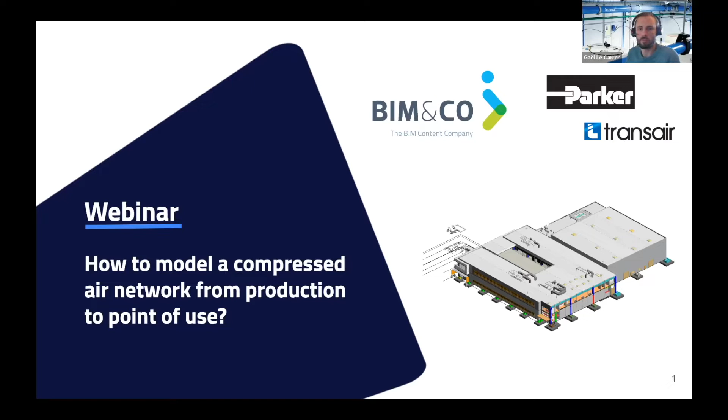Okay. So as for me, my name is Gael Le Carrer. I'm French and based in France, and I've been working for Parker Transair for 6 years now. And I'm part of a team called the Project Support Team, which is helping our customers with their industrial fluid project through design and sizing of installation, technical questions and other matters, drawings, quotation, bill of material, etc.

To start this webinar, first a presentation of who we are. So Transair, who we are. We are a manufacturer of modular aluminum pipe systems. What do we mean by that? Aluminum because our technology is using aluminum pipe, and modular because we have connectors with quick connections to do the connection in between the piping. Transair exists since 1996, so we've been on the market for more than 25 years now, and we are a made in France product.

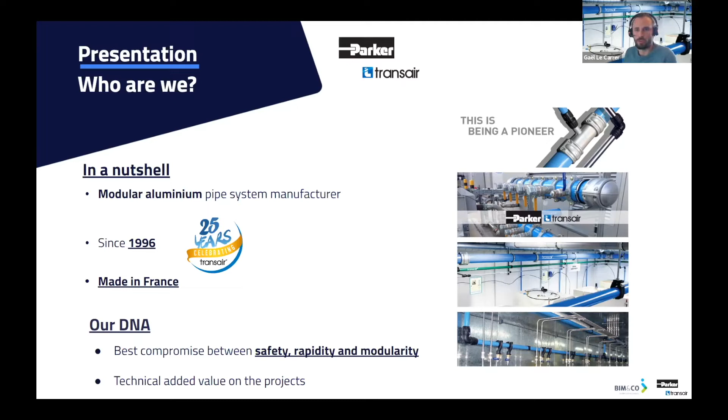When it comes to our DNA, I would say, Transair wants to offer the best compromise between first, safety. Safety is really what's most important for us. Safety of the persons who are going to install our system, but also the persons who are going to use it after. And second, rapidity and modularity with the use of our quick connection technology. Also, we want to have a technical added value on the project with the support of the team. I'm part of the project support team.

When it comes to our specification, Transair can be used to transport 3 types of fluid, I would say. First, we will have compressed air up to a maximum working pressure of 16 bar. Compressed air is used mainly for tooling, blow guns, but also all kinds of machines within the industry. And then we'll have vacuum up to 1 millibar in absolute pressure. This is what we call industrial vacuum. And there we will find, for example, vacuum packaging processes or heavy parts handling.

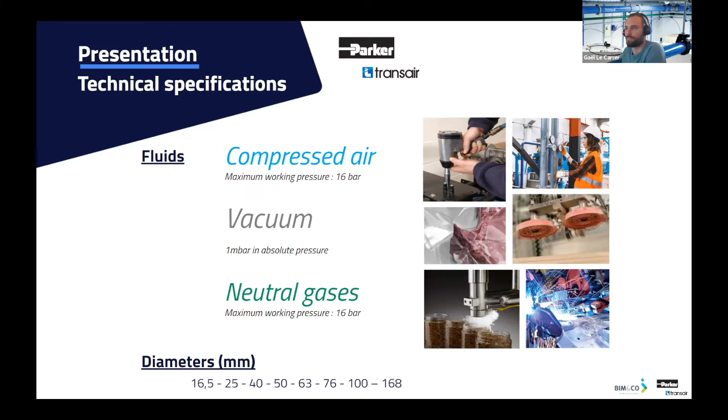Last, we will have neutral gases up to 16 bar, once again. And there, as neutral gases, we will mainly have first argon and its mixes with welding processes, for example, and then nitrogen with inerting processes through the food and bev industry. When it comes to our diameters, Transair offers a large range of products and diameters from 16.5 millimeters up to 168 millimeters, which allows us to make a project from the technical room with our biggest diameters up to the point of use with our smallest one. Now we'll leave it to you, Vincent.

Thank you, Gael. So same for us. Who is BIM&CO? First of all, we are part of a group called Trace Group, a software editor created more than 30 years ago. We are now more than 250 people, generating more than 20 million of revenue in Europe. We are doing many things from electrical calculation, PV calculation, energy management, or LCA analysis. And BIM&CO was created more than 6 years ago now with the mission of delivering technical content from manufacturers into digital processes, so basically into BIM models now.

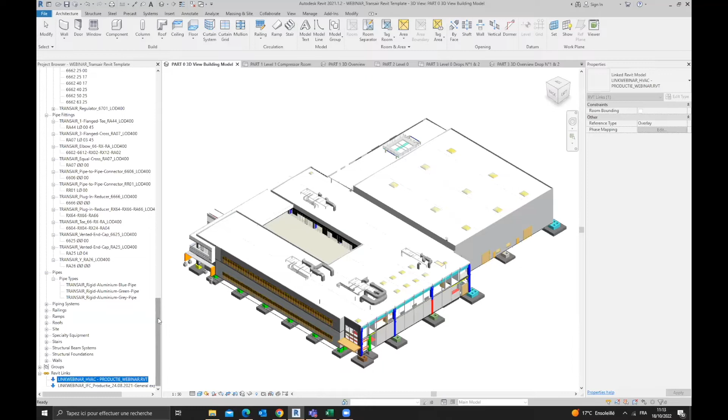To speak more about the work we're going to do today, I will switch to a floor view. So this is a floor view of the building. The part of the building which is going to interest us most today is the top part. You can see already other networks that have been designed in the HVAC model. And today we're going to be designing the compressed air network in a space in between those pipes. The network is going to run here on this top part.

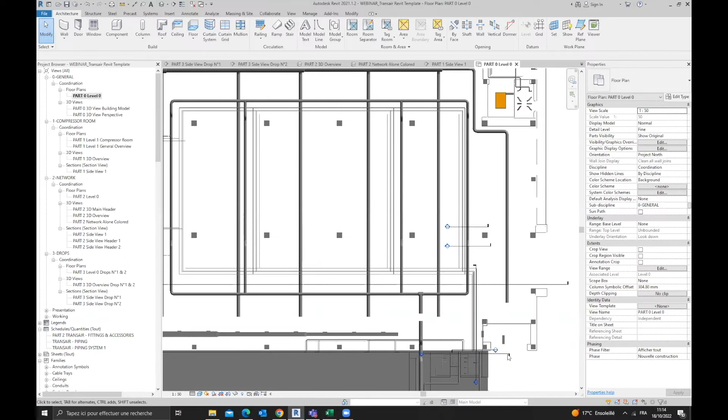And the compressor room, the technical room, will be coming from here, from that corner here, and is located at level 1. So this building has 2 levels, level 0 and level 1. The network will be at level 0 here on the top part, and the compressor room will be here on level 1.

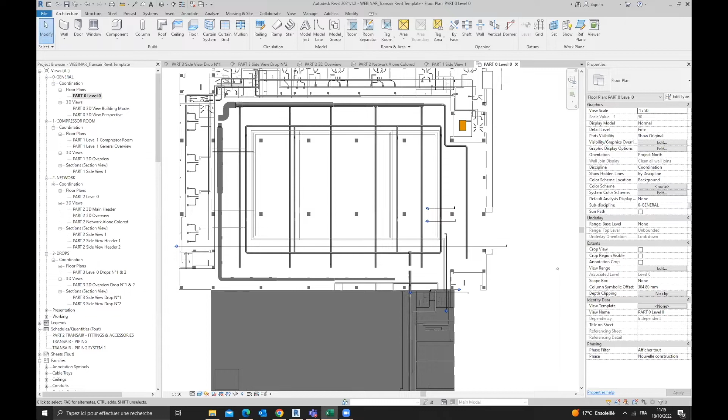So first we'll be designing the technical room, then we'll switch to the network, and we'll finish with a couple of drops, just for you to have a good idea of how we model the complete compressed air network. To speak about the compressor room, let's have a 3D view of it. So here I am at level 1, as I was saying.

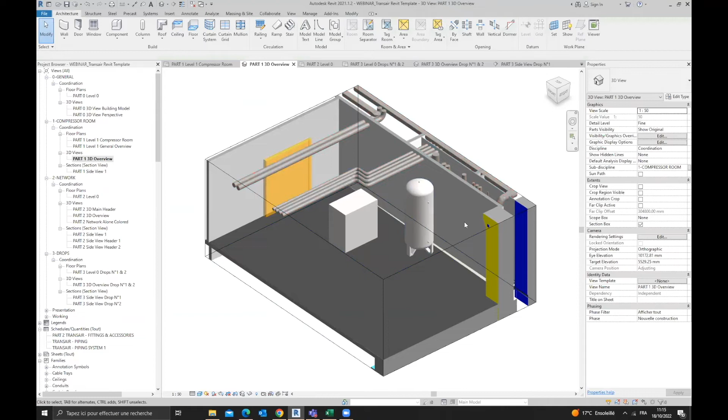I already have my compressors and receivers. So today we will be connecting the compressor and the receiver together, and we will also be creating a bypass on the receiver. As you can see, my compressor and the receiver already have the connectors, diameter 50 millimeter.

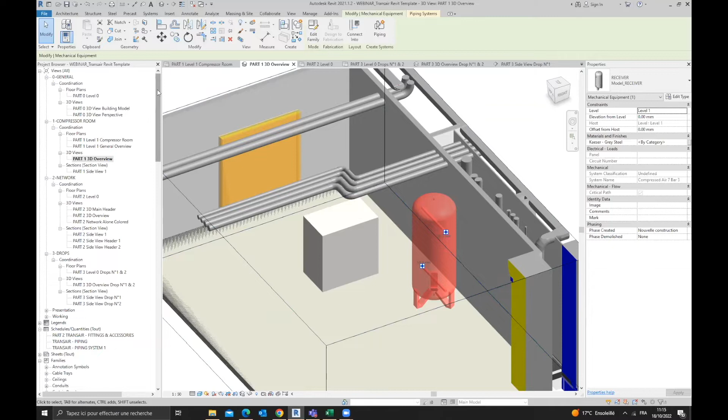When it comes to designing a compressor room, the most important thing to know is that you can't plug our pipes directly inside the machine. As I was saying, Transair is a quick connection technology. So you need a part that is going to be the link between our piping and the standard thread. That part, that family, is what we call a male stud, and it's going to be found within the project browser in the pipe accessories category. Part number 6605, so here, male stud fitting.

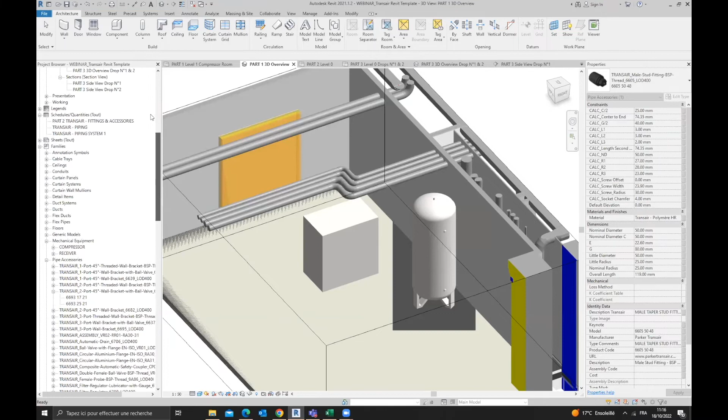What I recommend you do when designing your compressor room is to first connect those male studs on your machines. And once this is done, you can connect your machines in between them. To connect this male stud fitting, there are 2 main methods. I will switch to a floor view of the compressor room. The first method is what I would call a quick grip method. I'm not sure how to say it in English.

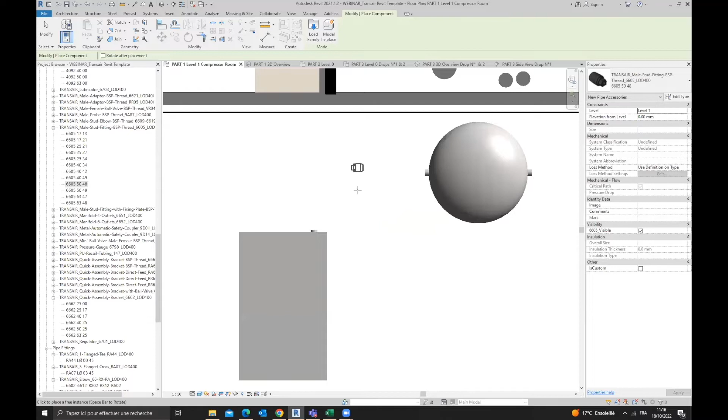I'm taking my object here, my family, and as you can see, my male stud is linked to my mouse. And if I approach my male stud fitting to the connectors of the compressor, we can see it switching side, going from horizontal to vertical. This is because if I put my male stud inside my model right now, Revit will automatically connect it to the connector of the compressor.

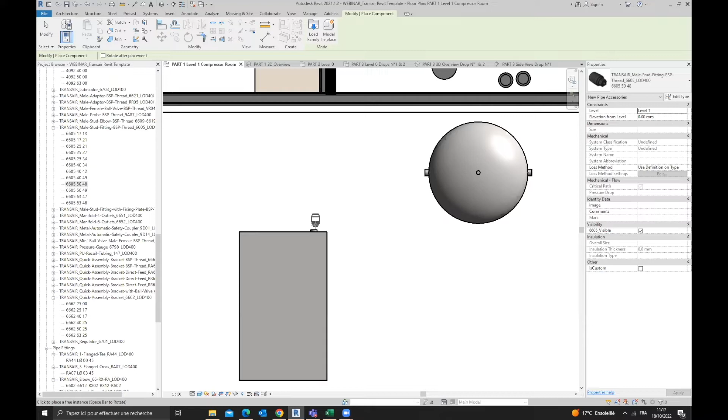So how is this possible? This is because the compressor is set as a mechanical equipment. So not special equipment or generic model, but if you set your equipment inside the category mechanical equipment, you will have that quick grip allowed. So if I bring my male stud next to the connector of the compressor, I'm placing my male stud, and you can see the male stud appearing and being directly connected on the compressor. So it really saves time and makes things a lot easier.

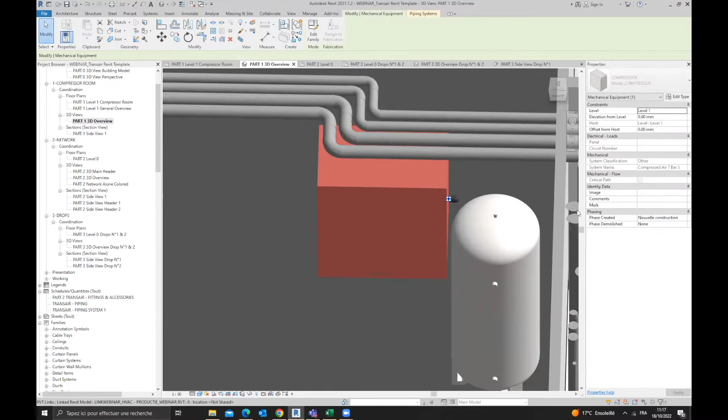If I switch back to my 3D view, let's change side a little bit. We can see that if I move my compressor, the male stud is also moving with it. Now let's switch back to our floor view.

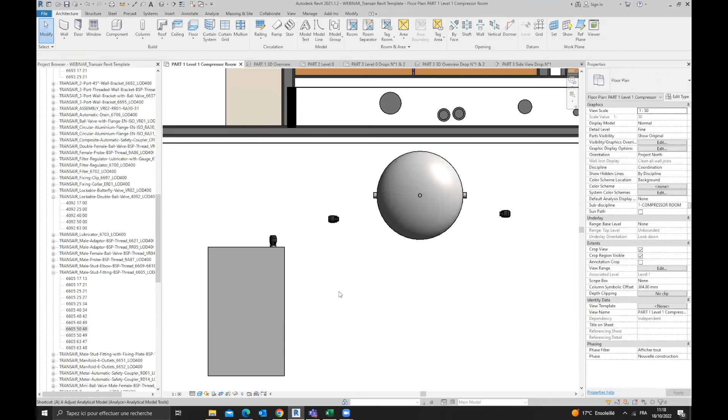Second method, a more classical one. So we're going to first place our male stud within our view, placing them manually from the project browser. I'm going to turn this one 180 degrees so it's facing the right side. Then I will align my male stud on the connectors of my receiver. So I'm aligning both of them.

And now I will be switching to the side view you can see here, which is going to give me a nice look of what's going on.

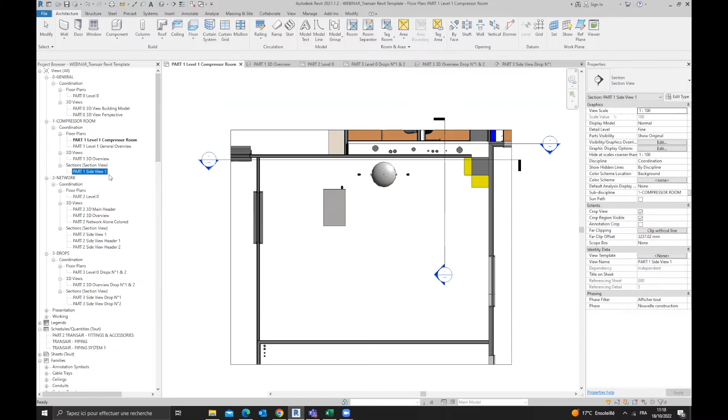Switching to the side view, we can see the male stud here at level 1, on the level 1, but elevation 0. I can take my male stud on the connector of the threaded part and bring it to the connector of my receiver. As you can see, when they are both at the same location in the model, you have that pink circle and pink cross in each other.

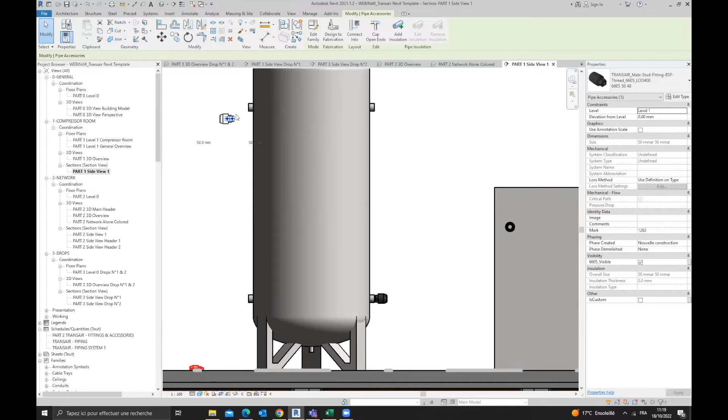If I place the male stud right now, the connection will be made between the male stud, so my accessory, and the receiver. I can do the same for the outlet, placing it, and you can see that in a matter of seconds, I've got both my mail studs connected to my receiver.

Something for you to know as well when it comes to compressor rooms: receivers located right after compressors always have the inlet at the bottom and the outlet at the top, for you to know.

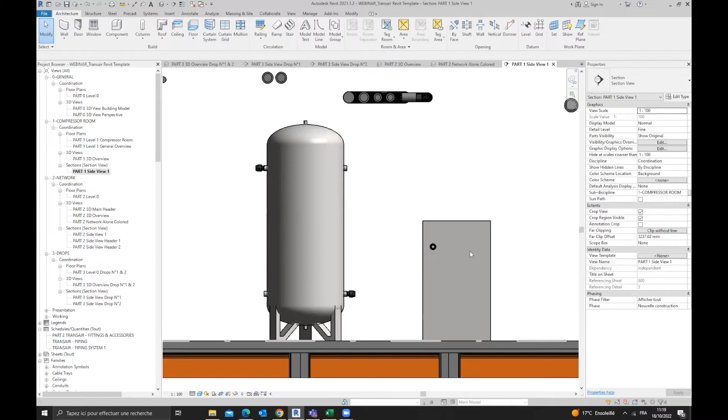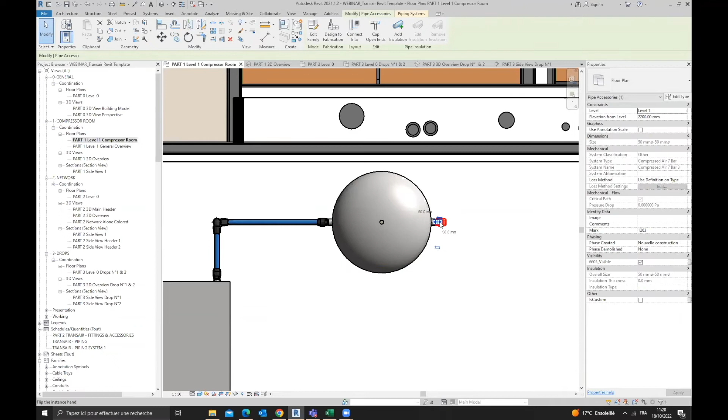Once we've connected our mail studs, our accessories on our equipment, I'd say the hardest part is done. Now we only need to connect them to each other. So I can go on my male stud, right click, draw pipe, and do the connection in between. I will need to change elevation and go to 600. I go inside my male stud, and I can do the same for the outlet of the receiver. Right click, draw pipe, and I will start my main header that will go to the main network, with elevation minus 1700.

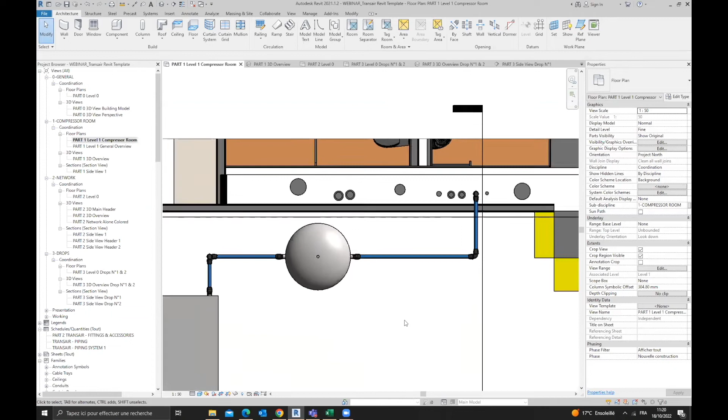As I was saying, the network is going to be located at level 0, and right now we are at level 1. So for now, we've done the connection of both the compressor and the receiver, as you can see. Now we are only missing the bypass.

So I will switch once again to my side view, and now I will convert this elbow into a T. When you click on Ts, elbows, or crosses, you will have little plus or minus signs appearing, and by clicking them you can convert elbows into Ts, Ts into elbows, and so on. So I will be converting my elbow into a T.

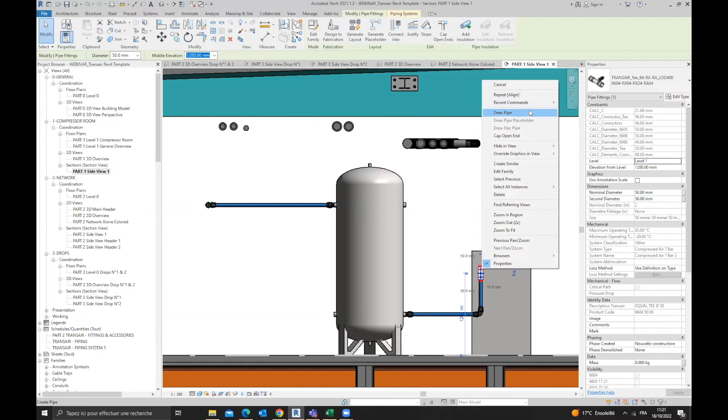Then once again, I can start drawing the network. The routing preferences within the template will do the job and provide me with elbows, automatic T creation, and so on, making things a lot easier to draw once everything is connected.

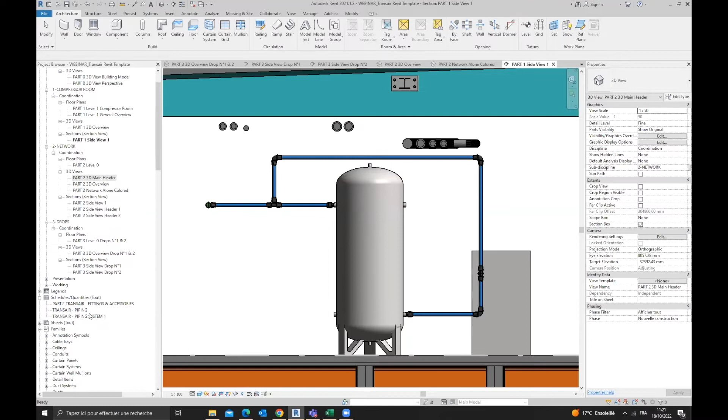Now we're only missing the valve. So, shutoff valve - we will find them once again under pipe accessories. Part number will be 4092, this one. I will choose diameter 50, and I will directly plug my valve onto my piping. Same as before, you've got automatic grip activated, so everything will stick to the piping in a nice manner.

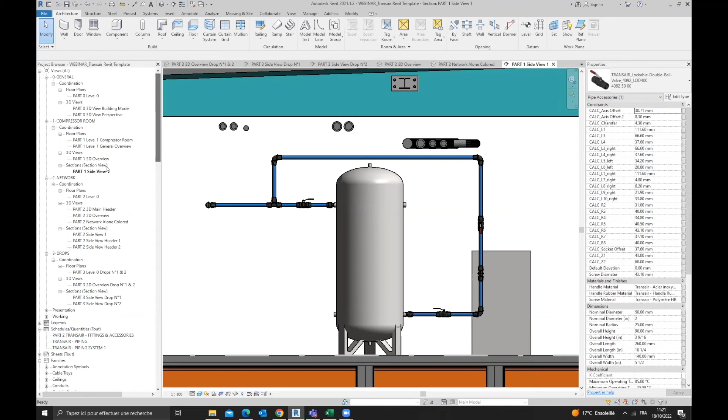If I switch back to the 3D overview, you can see the compressor room we just did: a compressor, a receiver, both connected, and a bypass on my receiver.

As well, for you to know, here we are with threaded equipment. If you have bigger equipment with flanges, they also have these parts - we have their flange fittings, which you can also find in pipe accessories, part numbers RA30 and 31.

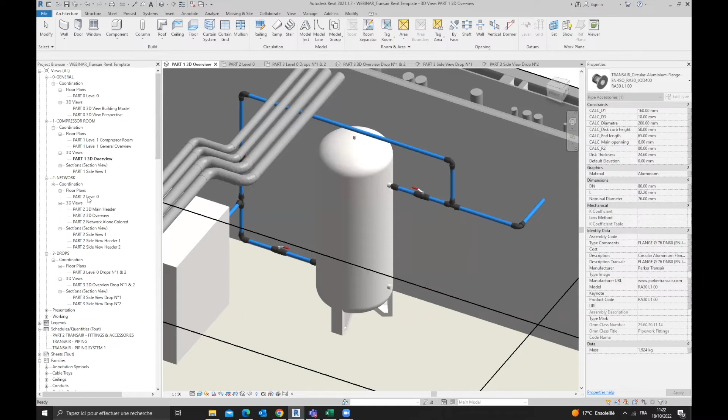Now let's continue to the main network. I will switch to my floor view of my main network. So the compressor room has been done here, just above, on level 1. We can see the beginning of our main header here, starting at diameter 50.

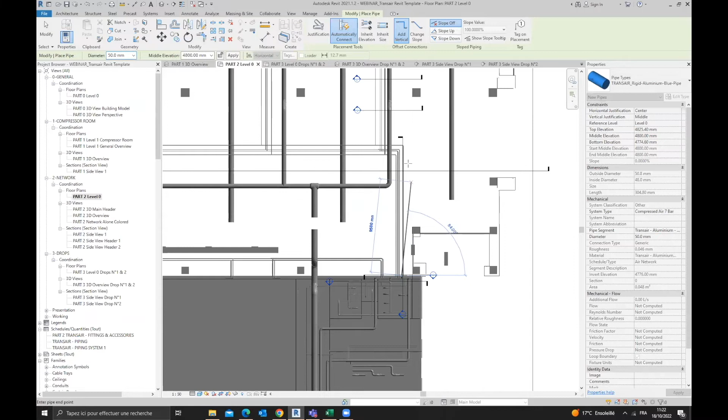To do the network, I will start where I finished with the compressor room, starting from the main header, and continue straight forward. When it comes to the main network, this isn't the hardest part in my opinion, because it's mostly length of piping to draw, and the routing preferences will set everything - elbows and tees. When it comes to networks, usually the loop is going to be one diameter under the main header.

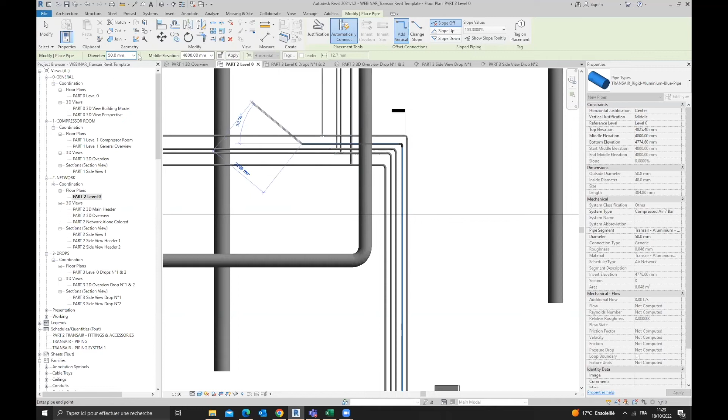So here we have a main header at diameter 50. We're going to switch our main loop to diameter 40. I change my diameter and continue to draw my loop. We can see the reducer automatically added by the routing preferences, by the template, and I just continue to carry on and create the loop in between the pipes.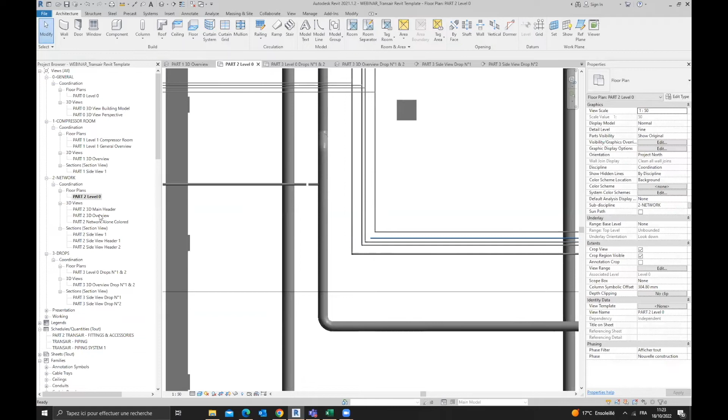If I switch to a 3D view of the area I'm working in right now, you can see the area where we are right now, with the piping already drawn within the HVAC model.

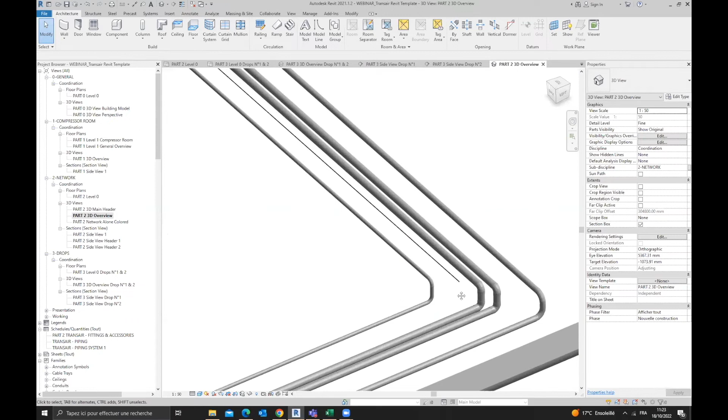If we go here on the side, there is a little particularity with that network: the sides are at a lower elevation than the main line. So here I am at 4,800 millimeters above level 1, above level 0, and here on the side I will be at 4,500. So I will take that into account to draw my loop.

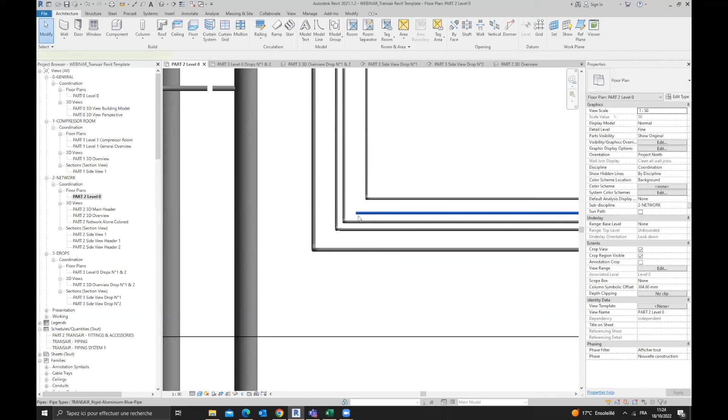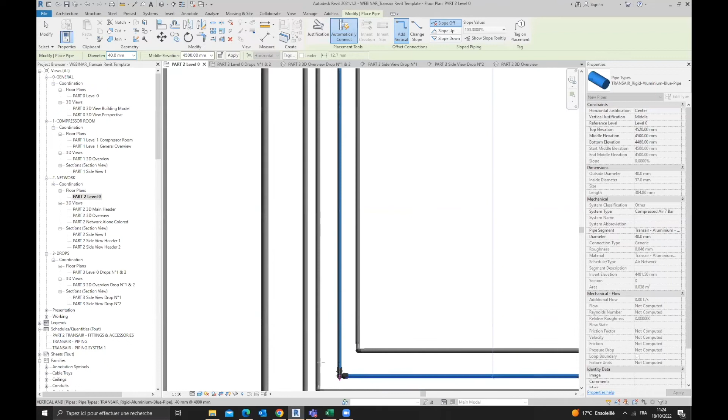Switch back to my ground view, continue from where I stopped, draw pipe. I will change the elevation here within that green panel to 4,500, and then I'm continuing my network. The routing preferences, as you see, will create everything automatically - elbows, tees.

I'm continuing to do my network. So here, on that side, I'm getting back to 4,800. Coming here at the end, 4,500 once again, and then connecting here on the main header.

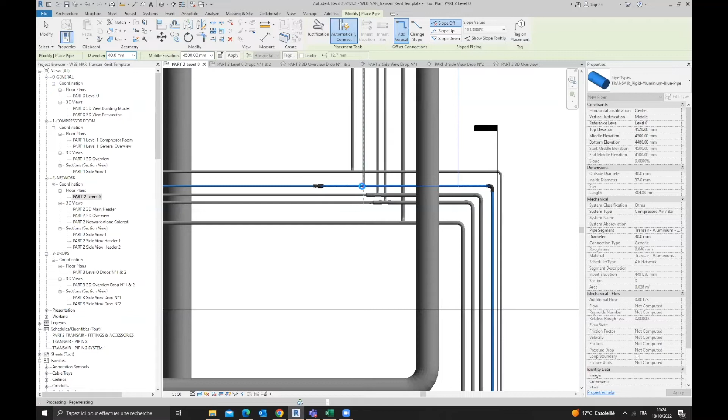Revit is calculating, and you can see the T automatically created. If I switch to the 3D overview, you can have a bit of appreciation of what we did. So the main header coming from the compressor room, my reducing T, diameter 40, which goes to one side of the loop, and my plug-in reducer, diameter 40 as well, which goes on the other side.

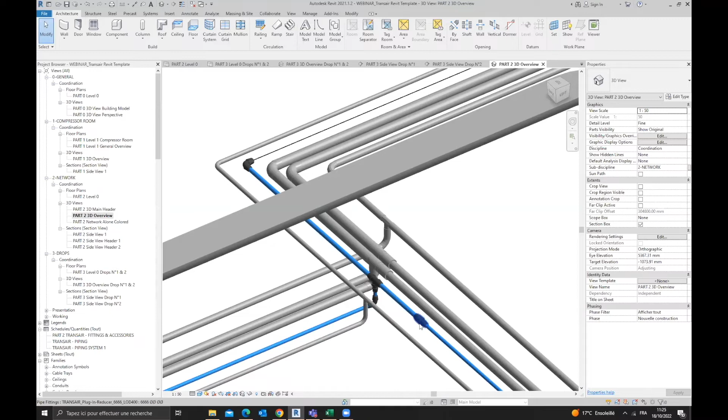Now a little side talk I would like to speak about before we head to the drops. It will concern error and mistake detection within the template.

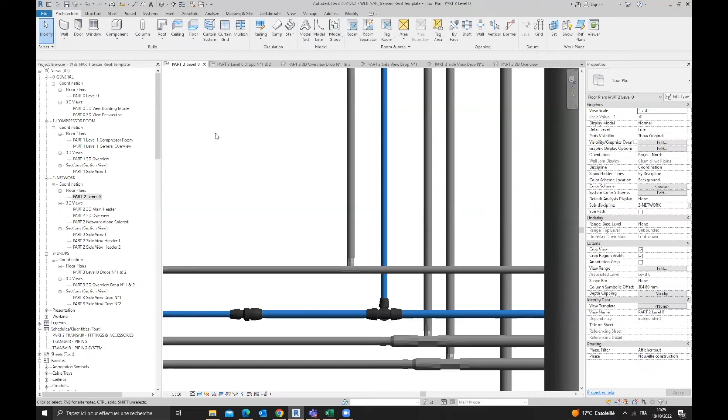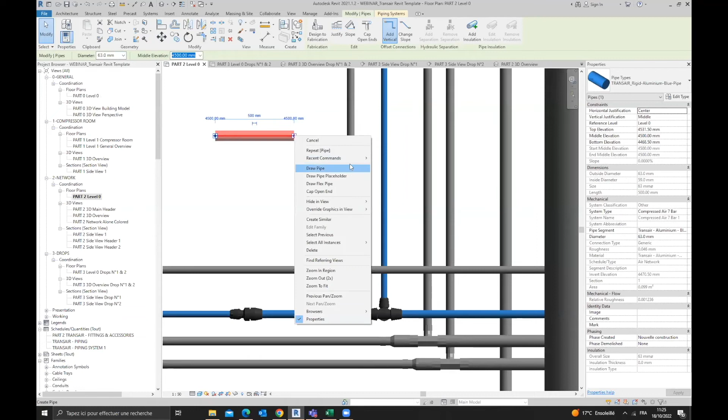I go on my loop. Revit is calculating, and it's going to provide us with a T, as it did before within the compressor room and the network. But when we have a closer look at that T, we can see something is kind of strange. There is some gap between the T and the piping. The piping is literally going inside the T on that side. So there is something wrong going with it.

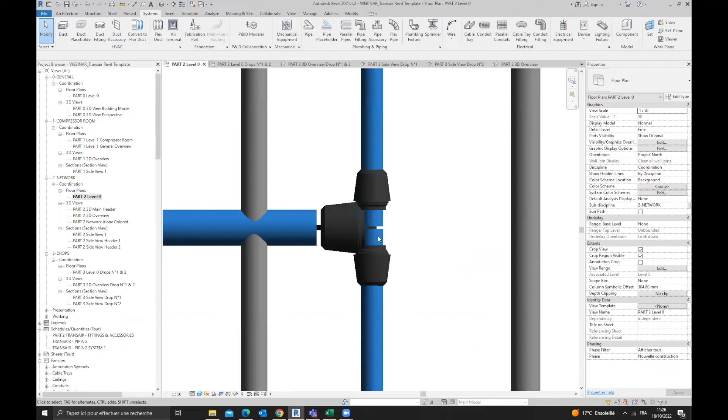Why? Because that T does not exist within our range. This is a mistake that Revit made using the tables. So how do you detect this mistake that can happen on the T on a rare occasion, because the T is the most complicated part? Well, there are two main methods.

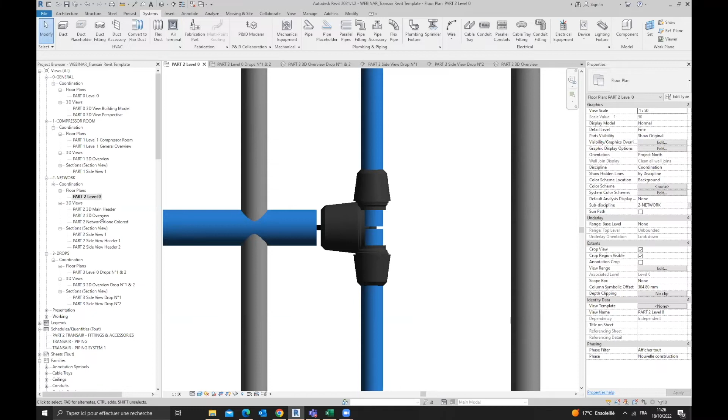First method, if you switch to a 3D view, you can see red circles appearing, red warning signs. When you see them on your 3D view on some parts, it means there is something wrong with that part, and you need to manually apply a correction to restore the proper part. So this is the first method, red warning signs.

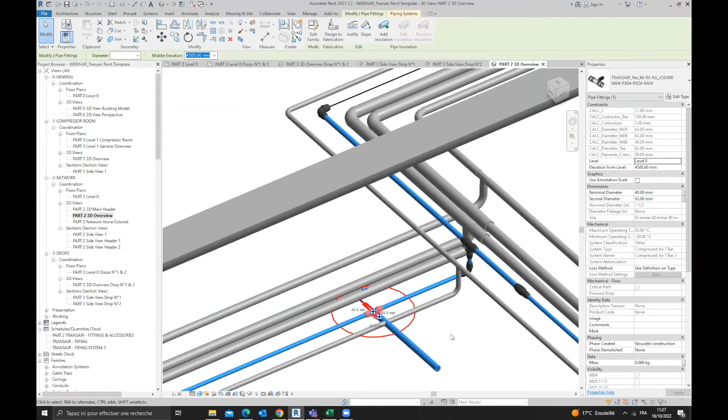Second method will be to use a shared parameter. So for you to know, each and every one of our families has a common shared parameter called a product code, which you will find within the identity data of each family. That product code, when it's right, will give you the part number of the family. So if I switch to the elbow here, you can see product code 6602 4000. So this is good, and the description going with it as well.

When the fitting is wrong, there is something not right going with it. Both of these will give you a non-display, meaning there is something wrong going on. Knowing that, you can easily create a schedule, a bill of quantities.

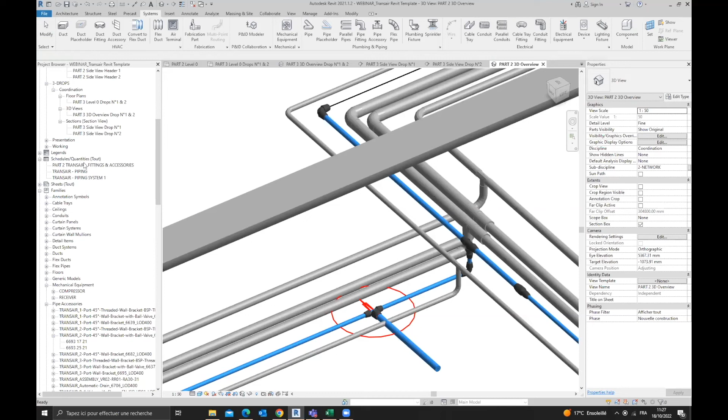I did set one already, and if you go to that list of quantities, you can see all the different parts we designed at the beginning. So diameter 50, valve, elbows, and so on. And you can see here at the last line, product code unknown, description unknown. You can see it's one quantity, diameter 40, family and type a T. This is the T that Revit messed up creating. So this is a nice way, when you are drawing a network, to have a schedule set and check on a regular basis if you have those non-products appearing, and correct the mistakes right away.

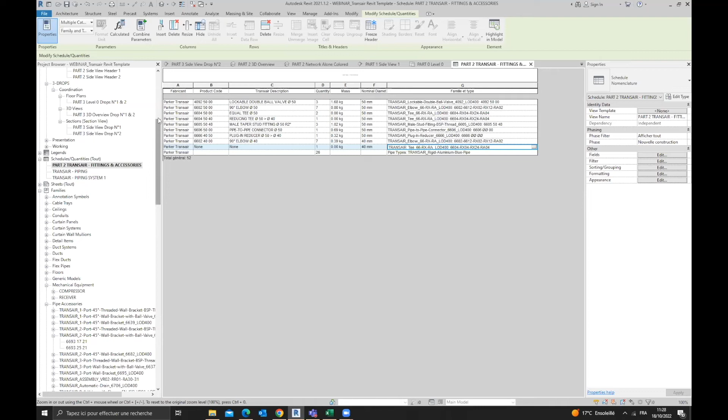If I switch back to my main network, here's a problem. It's because the reducing T wants to do something too complicated. It needs to put several families on top of each other. It's too complicated for Revit to do.

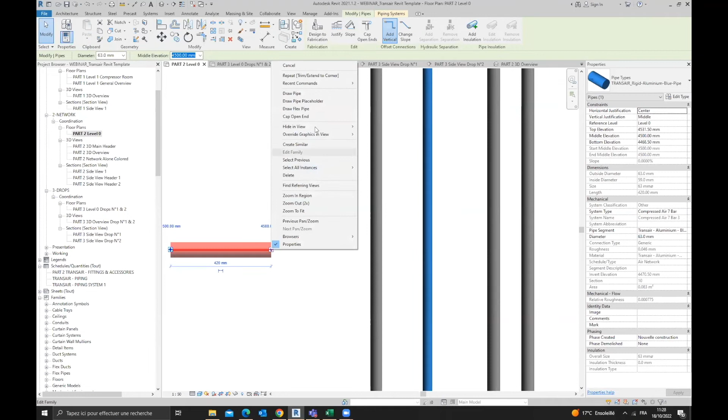So what I would advise you to do is to simply cut the action you want to do into small pieces. So here, for example, first go from 63 to diameter 40. Revit will create the plugin reducer, and then from diameter 40 on one part, diameter 40 on the other one, and the equal T will be properly created.

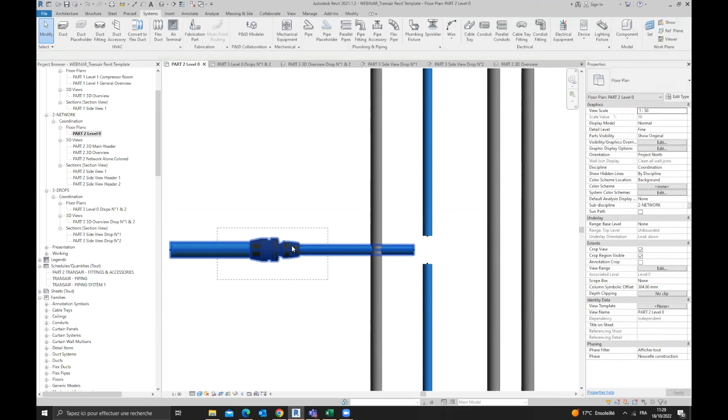Now, third and last part, drops. I will switch to the area we have right here as a 3D view, with that pillar. You can see that pillar.

When it comes to drop, two things to know. The mistake we commonly see in models is the use of T's when it comes to drop creation. A drop, just to make it clear, is going to be the piece of pipe that links your network, which is next to the ceiling, to the point of use, which is going to be at the bottom.

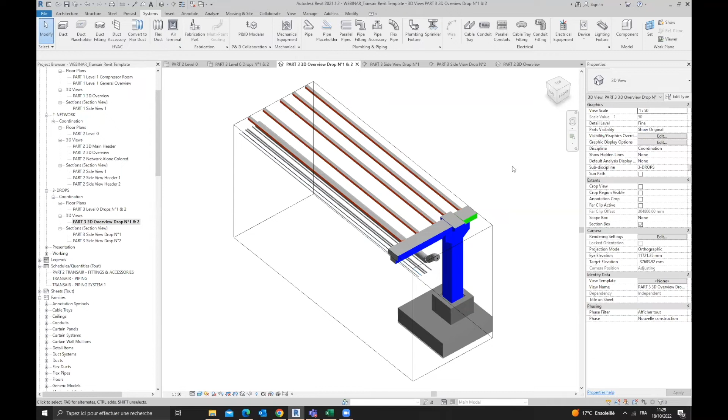Because when it comes to compressed air, we can have condensate within the network, we don't use T's to create drops, but we use a swan neck to do the connection. So on traditional networks, we have swan necks made with T's and elbows, but when it comes to Transair, we've got a piece that does its job already by itself. This is what we call a quick bracket with swan neck.

So same in the pipe accessories, this is going to be part number 6662.

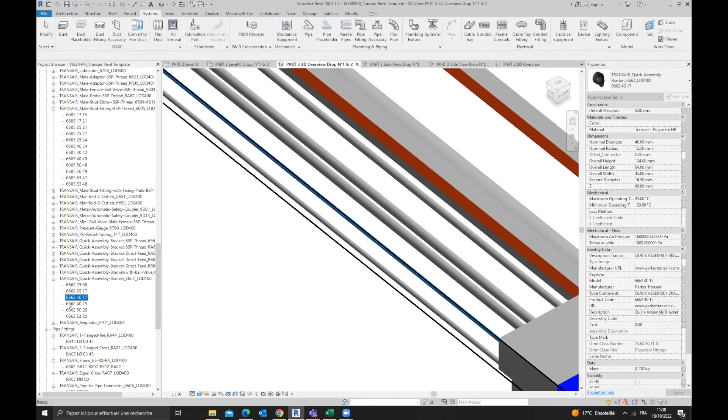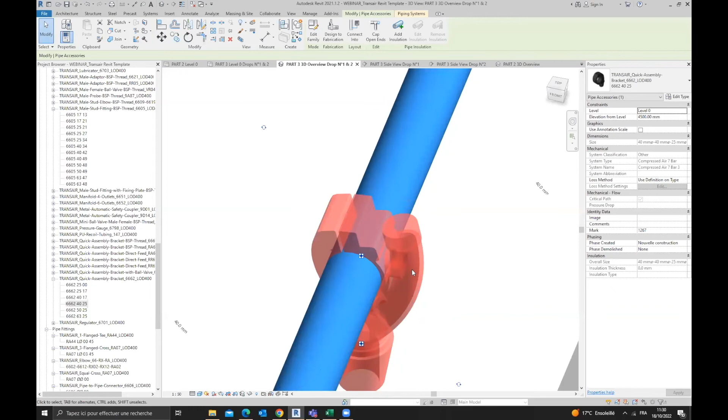And that quick bracket, if I put it here on the network and I'm zooming in, you're going to have the connection from the side of the pipe. So you're going to have to drill a hole, and you can see the condensate is going to be retained at the bottom of the pipe, and the connection will be on the side. Meaning with one part, you can do this connection with a swan neck, and you don't need to use a T with a bunch of elbows or any other configuration.

First thing to know: when it comes to drops, use quick assembly brackets with a swan neck. Second thing to know - I see it's already 30, I will try to make it quick.

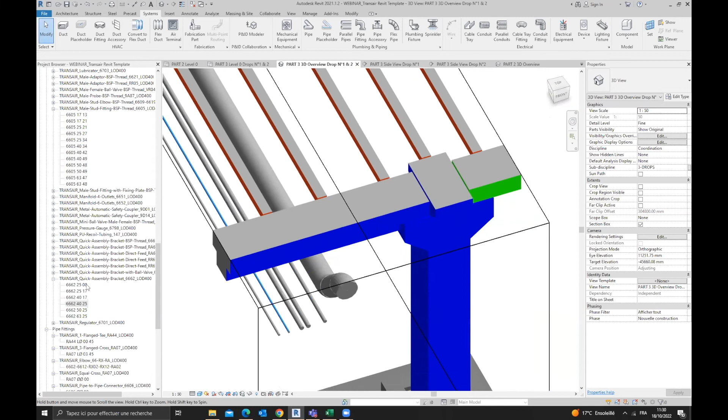Wall brackets - you will have your point of use, and next to your point of use, you will mainly use wall brackets. These wall brackets are a family with hosts.

So if I try to add them within my model, you will have that little block sign from Revit, which tells you there is no valid host. You can't put it there. If I put it next to that pillar, I've got a valid face, and I can apply my wall bracket next to it.

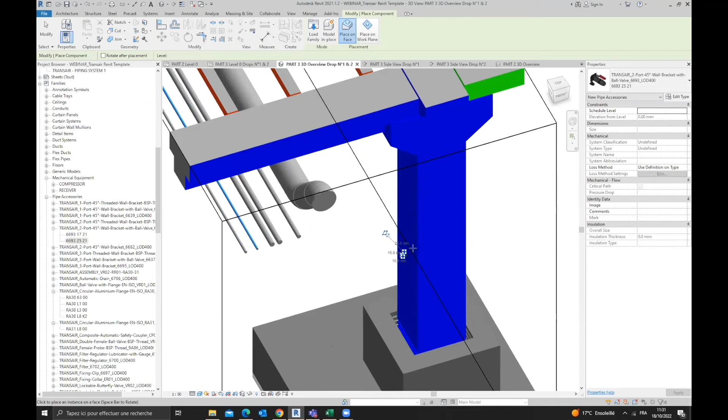So wall brackets are a family with host. If you don't have any valid host, but you still want to use the wall bracket, one recommendation I will give you is to use what is called a reference plane.

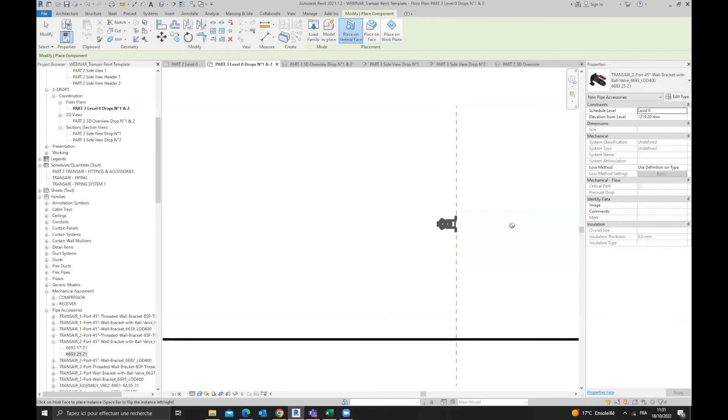So you go in the architecture tab, reference plane here on the right. You create a reference plane, and that reference plane will be a valid host for your wall bracket. You can see I can't put the wall bracket here in the area, but on the reference plane I can. And then you can move your reference plane to move your wall bracket.

When it comes to the creation of drops, same as the compressor room, in my opinion the best thing is to first set your wall bracket and your quick assembly bracket with the swan neck, and then to connect the both of them. So I've got my two wall brackets set.

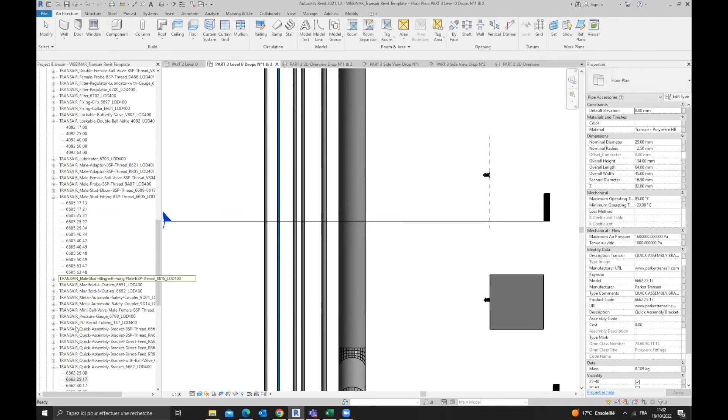I'm going to put my quick bracket with swan neck on my network, automatically placing them on the network in front of my wall brackets. One, two - I can also turn them if I need, and so on.

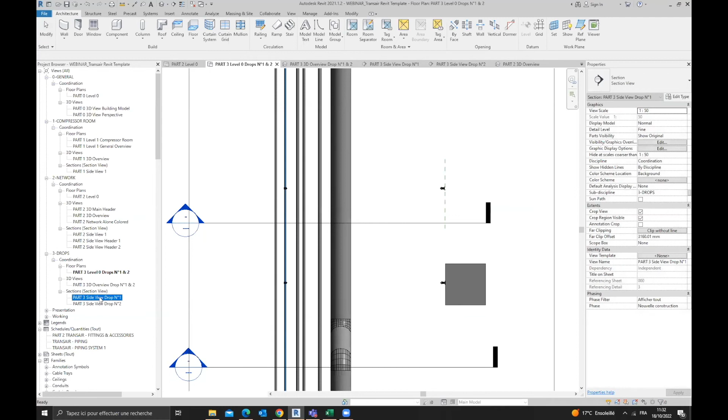And then switch to a side view. You will have your bracket on one hand and your wall bracket on the other, and just connect simply the two of them.

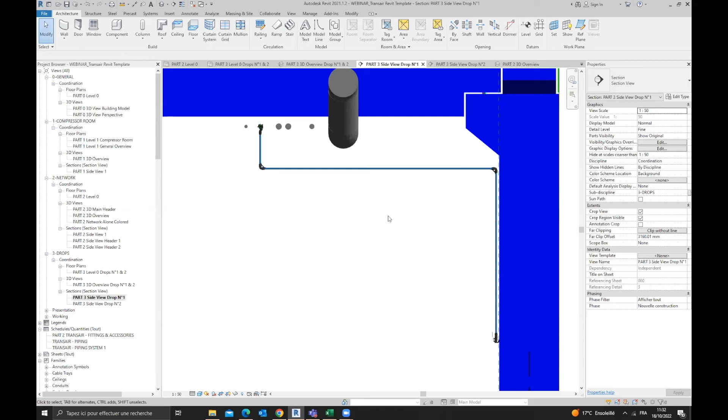So let's start from the wall bracket, let's go up. I can use the adjust feature. Revit calculates, and the routing preferences give us the elbow, and we can do exactly the same here.

We go up, we go under the piping, and we go straight inside our quick brackets. And there you have it - you have a completely done drop.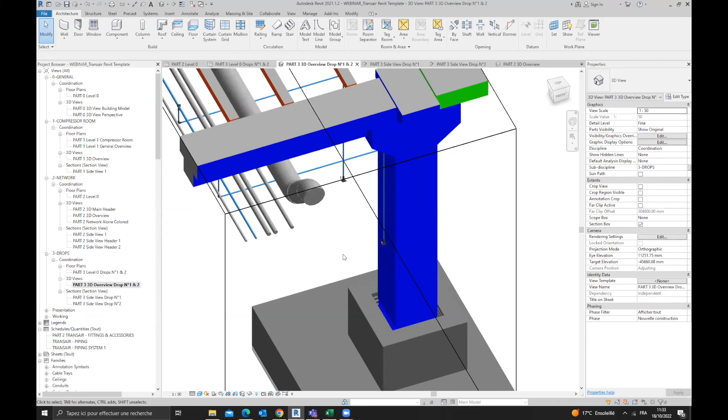If I switch to the 3D view, we can see the drops here underneath. So we've got a really nice view. And if I switch to all the network that has been done already today, you can see the compressor room on one part, our main header, the loop, and our two drops.

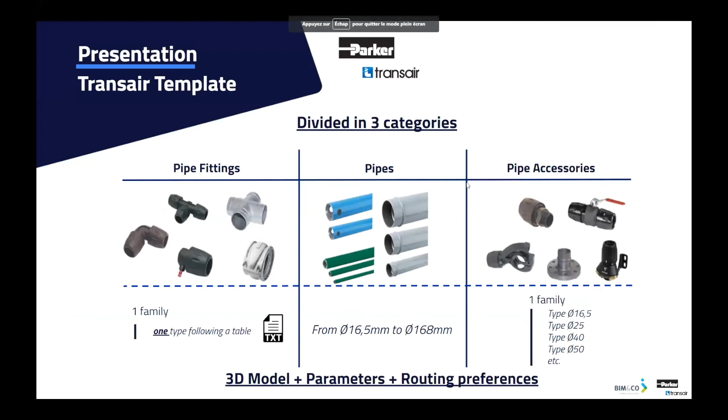Many thanks, Gael, it was a clear, impressive demo. Indeed, we have a few questions. Feel free to ask more. I think the two questions are for you, Gael.

The first one was, can you please show the first steps how to correctly upload a family template to the Revit model? Okay, so if you want to apply the template - I can't see the answer here, I'm missing it.

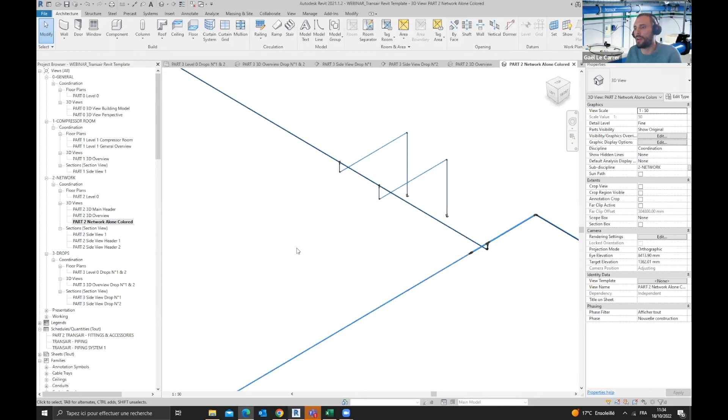So how do you set the template inside the project? This is the question: how to correctly upload the families template to a Revit model. Okay, so two ways to do it. First, you can create a new project. So new project, I'm going to arrive here on this type there. Every project needs to have a template associated with it, and there you can browse. I'm going to browse, and I can select my Transair template.

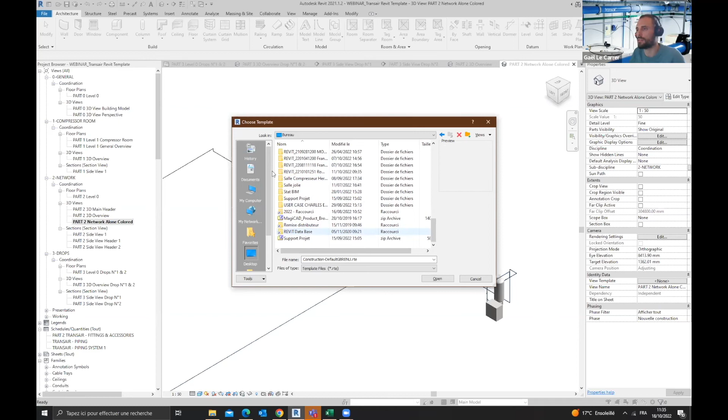So let's say Revit database. And from there, okay, and Revit will just create a new project with that template associated, and you will have access to all the families, to each and every one of them. I hope it's not going to be too long.

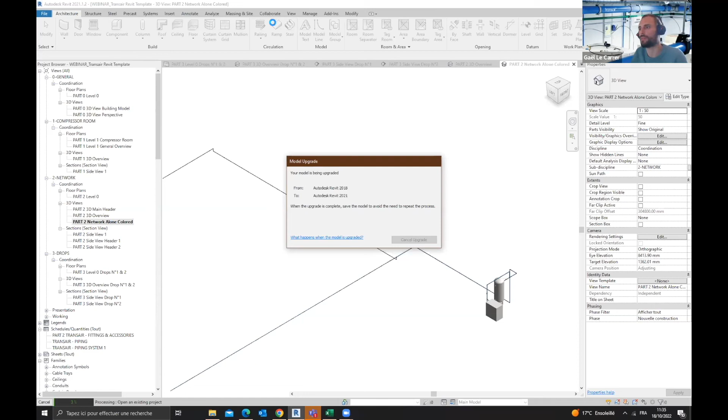The second way you can do that is to, so there is some model upgrade. Okay, Revit is calculating. As you can see, the template is available on Autodesk Revit 2018, so everyone is able to use it, because I don't think Revit versions before that are used now, or at least not much. And you can download the last updated version of the Revit template with its Revit families on the BIM&CO.com website, which Gael updates from time to time. Hope it answered the question.

Second question, an interesting one, specific to the product itself. Do we need a flexible join between the compressor and the aluminum pipe? Okay, just to come back, I will come back to the first question because Revit is uploading the model. But when it comes to flexible, this is a commonly asked question: do you need one? When it comes to our technology, Transair technology, it's not mandatory. Why?

The use of a hose between the compressor and the piping is mostly when you have stainless steel networks. Stainless steel is really heavy compared to aluminum. It's actually 4 times heavier than aluminum. So when you have a connection between a compressor and stainless steel equipment, it's going to be extremely heavy, and it's going to weigh on the outlet of your compressor, which can be bad. This is why we use flexible hoses on this type of connection.

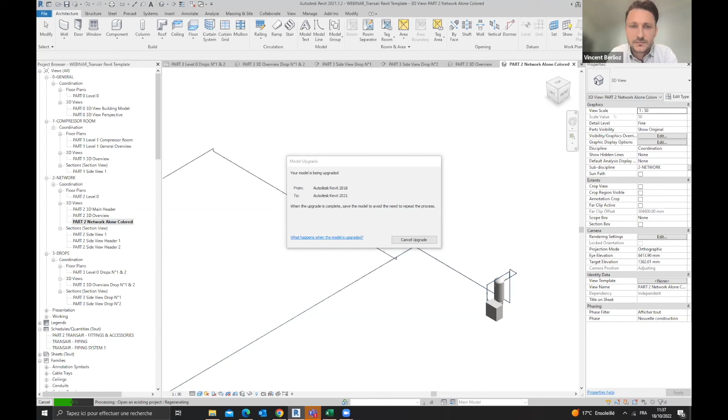When it comes to us, we are in aluminum, so we are extremely light, even lighter than if we were going to use hoses on the outlet of the compressor. That's why when you are using Transair, you don't need hoses on the connection of your compressors. Aluminum is already so light. And also because we have our quick connection technology, we are not welded, so the connectors have a bit of gap between them, which helps in case you would have vibration or that sort of thing. Our connection will take it without any problem.

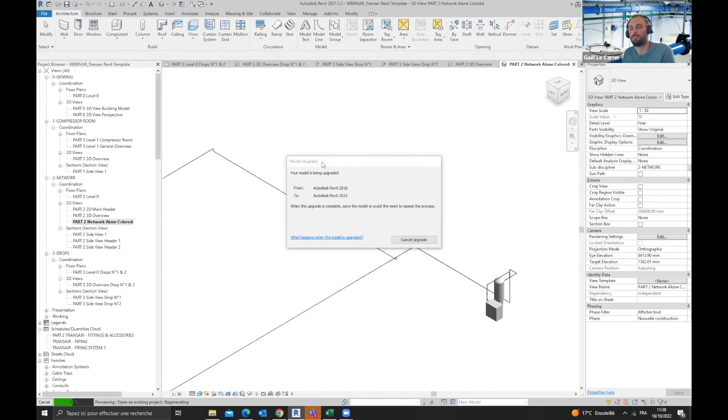There is no air leak calculation. When it comes to pressure drop calculation, we've got a little software program called the Transair Flow Calculator that we use on the side to do that.

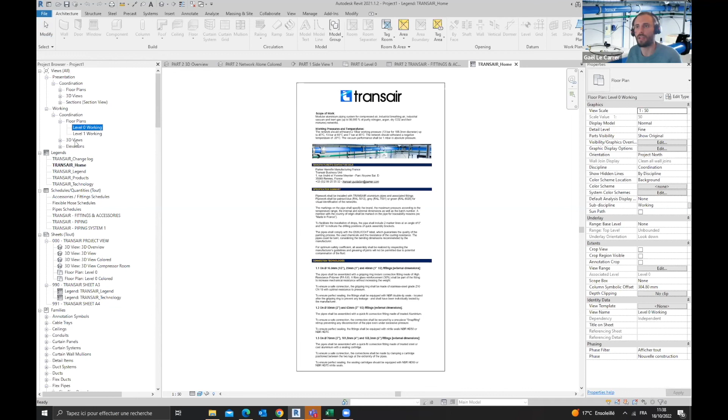So when you upload the template, to come back to the first question, you will have an example drawn already, as you can see. This is just an example to highlight the families and the usage. When you want to use a new project, just delete everything within the example, and you can start fresh. Otherwise, you can of course use the insert tab, so insert, load family, and you can manually load the families, either from the template or that you have downloaded on the BIM&CO website.